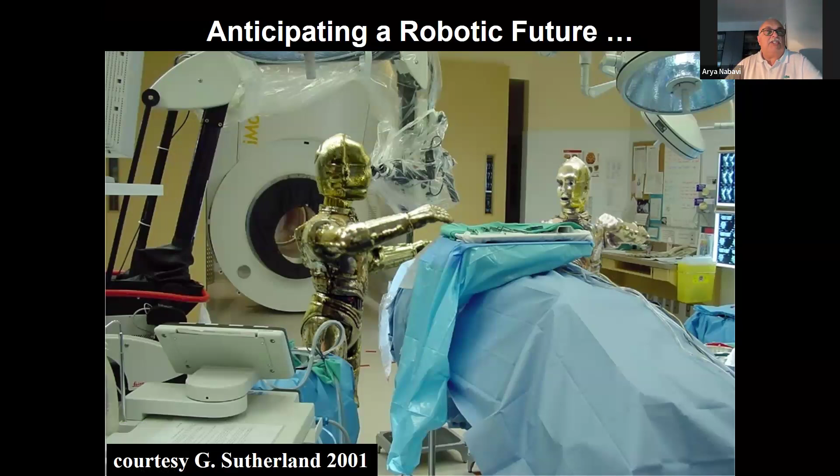I think all of us anticipate a robotic future. However, I think we have a pretty hazy idea of what it actually will look like. Now, this would be perfect for us to be on vacation and have these C3PO units work. However, I think none of us wants to be without work or without food.

So a lot of people look with apprehension on the future of robotics, and particularly surgeons have to look with some skepticism, because at the end of the day, it is us who really has to talk to the patient's relatives and make sure that the patient is well.

We need to form a solid basis for dialogue between engineers and roboticist developers. For this, we need to understand the subject and define our own demands based on firm knowledge of what we actually want to achieve and how we want to contribute to the medical field. That's very important—not just another checkbox on a webpage that says we do robotics as well. So we need to really concentrate on what we want to achieve.

A short overview of what this talk will cover: first, the question of what is a robot. Then I'd like to explore whether there is one robot, or multiple current systems, with common denominators and common differences, enlarging on classification in regards to man-machine interaction. I want to make sure we all have the basis for knowing how to advance and where to advance to. Then I'd like to go into a couple of the caveats that future development might hold for us.

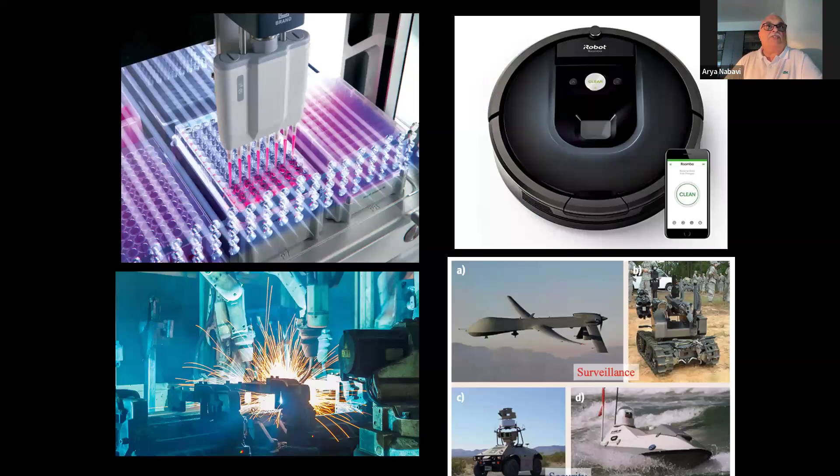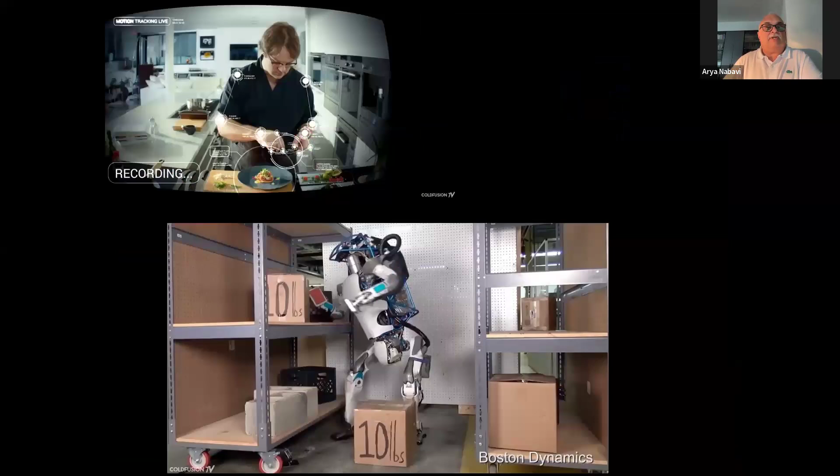We have household appliances like the vacuum cleaner. We have industrial robots. We even have military robots, which unfortunately have been quite notorious over the last couple of years.

But what most people likely think about when they hear robots are household appliances, which I find particularly appealing when you look at this cooking robot, which basically autonomously cooks according to a cookbook. You don't have to argue with anybody about whether the salt is too much, because the robot already provides that.

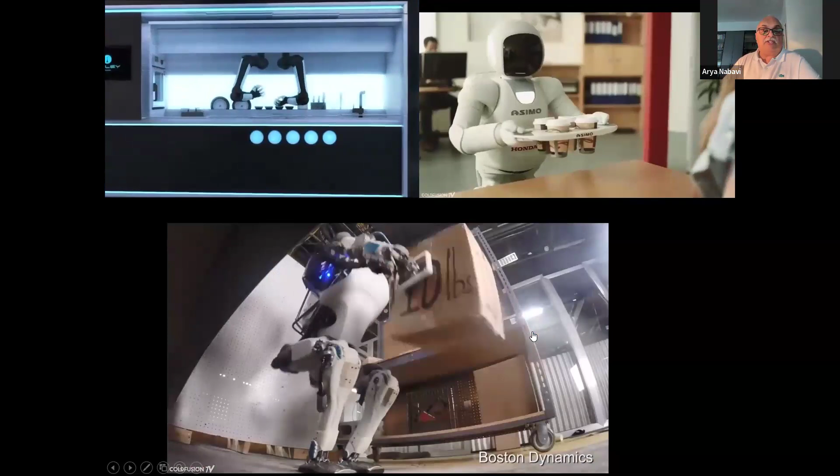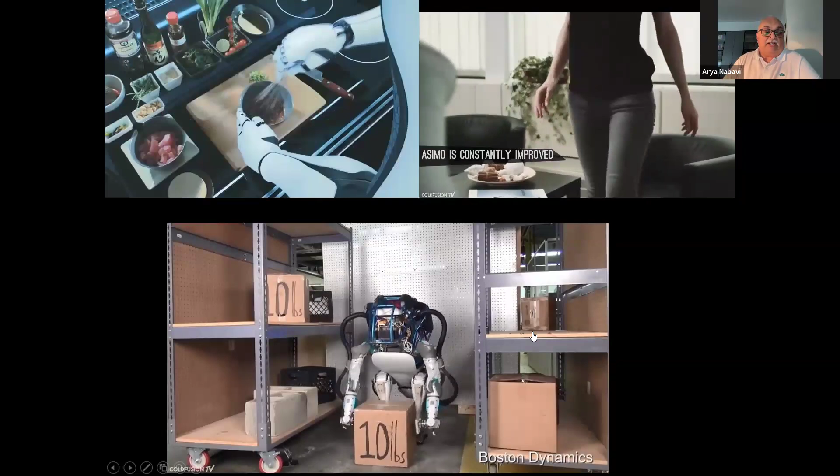However, what is imminent for industrial nations are these heavy-duty working robots with exoskeletons, and I'm sure a lot of you already think about military usages, which hopefully will never happen. However, everything that is thinkable is done by humans.

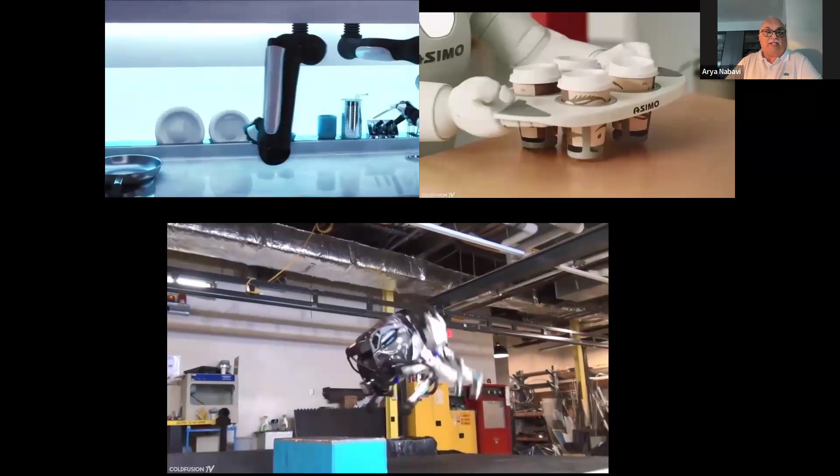You see that the gait and balance appear very good in this video, but according to the people who made it, when you ask them, this is one of more than 100 tries, and they stopped trying after this successful situation. So this is real, but it's not routine. We will still have to work on that.

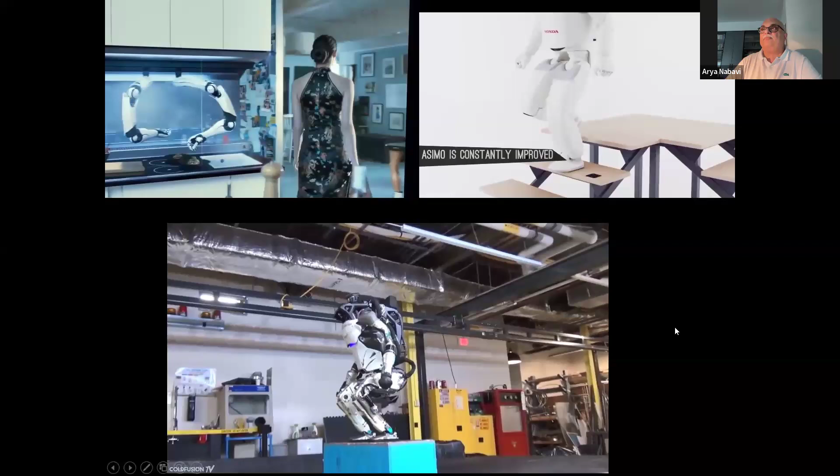Having all these forms of robots makes it very difficult to define what we are actually looking at when we're looking at clinical robotics, surgical robots, or medical appliances.

Robotics is nothing else than a multidisciplinary—by necessity, multidisciplinary—science, which involves all kinds of engineers, material scientists, and philosophy, which we will go into at the end. But mostly, from our perspective, it involves medical personnel and surgeons who have to define where the direction is going.

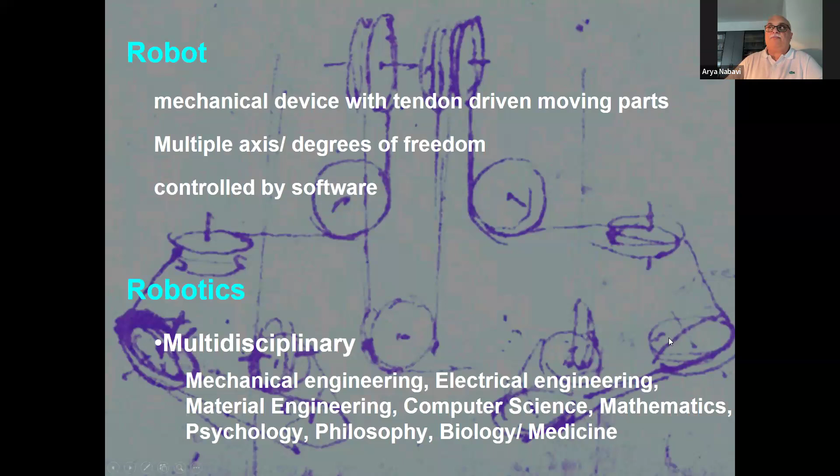Just to illustrate the confusion that we have in the literature, look at two prominent publications. One is in Surgical Neurology International, a review article about robotics in neurosurgery. I hope you would ask, what kind of robots? What are they used for? They don't allude to any of that. They talk about 100 educational programs in the United States and say that 30 of those offer robotics for cranial surgery, 40 offer robotics for spinal surgery. They do not specify whether they are the same services, what the robots actually do, what they're used for, and what kind of robots they are. So we already have a confusion in the labeling.

Another problem is the application bandwidth. As you've seen in the examples of robots I showed you, there are many applications, so robotics in neurosurgery is a tremendous field. However, of those neurosurgical-focused articles, 15 plus 3 editorials, so the topic is highly opinionated, 8 were spinal applications. I will not go into the one truly collaborative one; everything else was just entry-target positioning of screws. There was one Da Vinci review, and basically 6 stereotactic applications on the brain. So there is nothing where you'd say, okay, this is something where I actually need something computer-controlled. A lot of these things can be done by stereotactic devices or other holding devices.

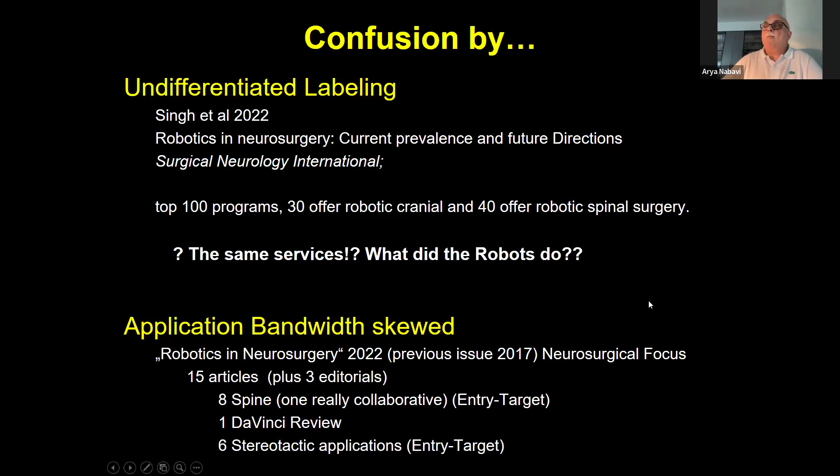The first examples of robots in neurosurgery were with the Puma 200 in 1985. I won't go year by year, but what you see here is a robot affixed to a table in the immediate vicinity of an imaging device, and remarkably this is still on the market. You have a robot that is a pointing device near a CT scanner, or within this burr-hole-mounted device. There were burr-hole-mounted devices way back in the 1940s, so we're going back with new innovations. That's also something that needs to be addressed by task forces.

However, this Monteris device allows you to work within an MRI, so within confined spaces. I'll allude to that later on. And then there's a multitude of systems that are used in spine surgery.

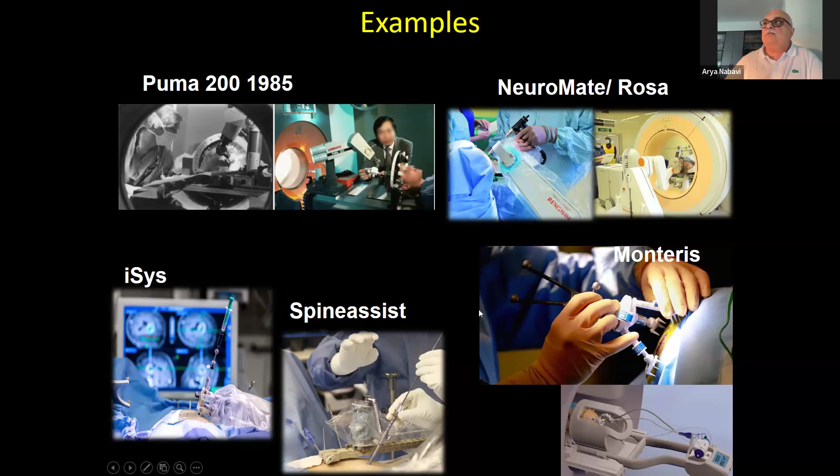Then what most people refer to as robotics is a telemanipulation device, the Da Vinci system. This is the most highly marketed system worldwide, and it definitely has advantages in urology, gynecology, and general surgery, since there's space enough for this device to be placed within and without the body. Now, everyone who does neurosurgery knows that space is the limiting aspect, so we will not have something like this on top of the head. The accessibility in neurosurgery is not really given with the Da Vinci system.

However, what needs to be borne in mind, and that's a good part about the system, is as a telemanipulator, this person is not running the computers—those people back here are running the computers. Now, this might not be very comfortable. However, a friend of mine in gynecology at the Brighams said, okay, while I could do 5 surgeries before we had the Da Vinci, now I can do 4, but my back is not hurting as much anymore because the ergonomics of sitting in the seat is much, much better. This can also be something where robots help us save the resource of the surgeon.

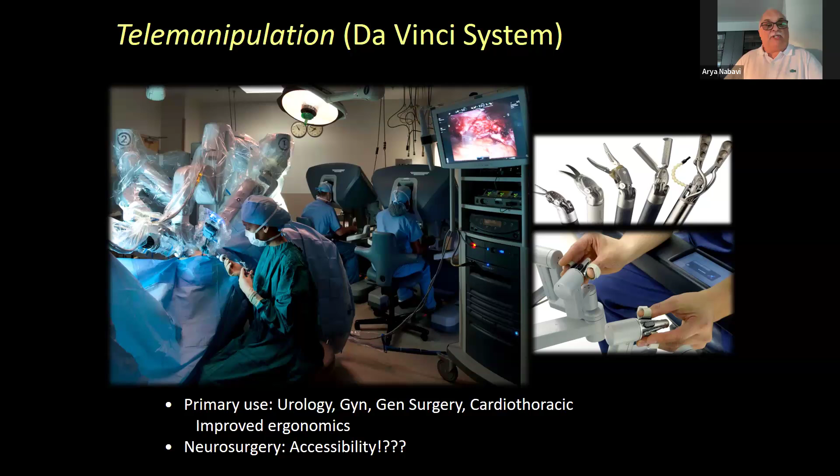Now, we neurosurgeons basically exploit ourselves to a much higher level than is good for our bodies. Maybe with computers and robots, we can have more ergonomics and do surgery for much, much longer than at present possible.

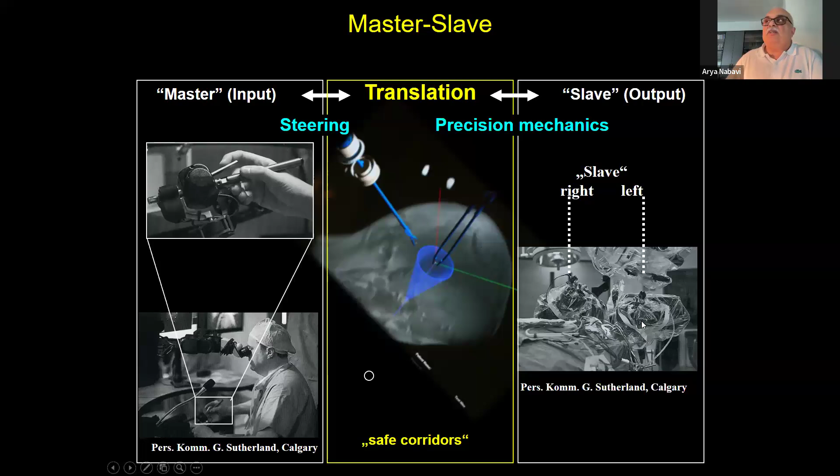However, what's really interesting is the miniaturization of robots and their application within a certain setting. These are all courtesy of Garnet Sutherland in Calgary. The interesting portion here is to describe a master-slave system. The master is basically us, and we use an input device that allows us to steer a robot in the immediate vicinity as a surgical robot. There are some constraints, such as corridors and neuronavigational aspects, as well as depiction of instruments in 3D, which allow us to run this robot on a monitor. Nevertheless, it is nothing else than the telemanipulation device of a Da Vinci, because it translates every motion that Garnet has—it's basically at present the only system I know of where every motion given as input through this device is immediately translated to one of those robotic devices in the operating room. We'll see a couple more images of that.

The basic idea, and you saw all those systems that are basically trajectory-based approaches to specific targets, cannot be defined by what they actually do.

Whether we would actually like to have autonomous robots that do everything by themselves, let's put that aside for discussion. I personally would not like to have that. However, I could imagine myself appreciating a robot that drills away the temporal bone for me, so I can do the interesting portions where I need my fine motor skills, after the heavy duty work is done.

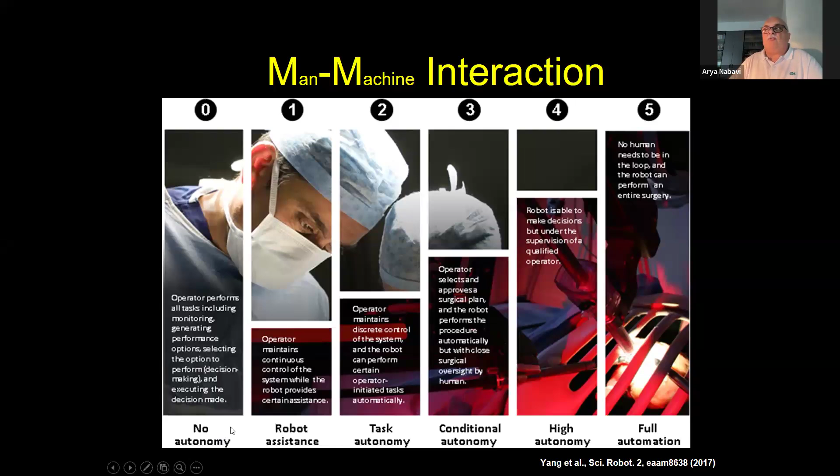Robots have another advantage. They do not need much space, and they can stay in an area for a prolonged period of time without their back hurting.

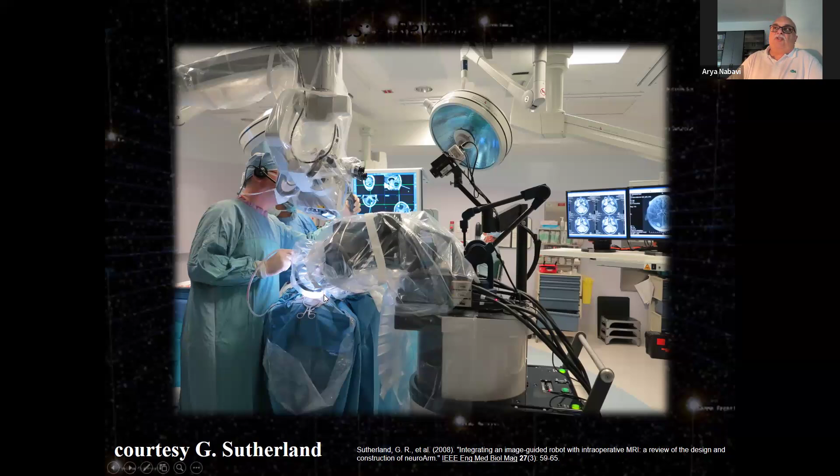This is again courtesy of Garnett, who is working on this, which is almost as close as it gets to collaborative or cooperative robotics, because he's working on a brain tumor, and this robotic device, which is basically a sidestep of the robo arm of the ISS, produced by Canadians, in Canada, in order to have four hands within his surgical area.

He definitely does surgery. He's not always sitting here in his chair, but this is another example of how using input devices in a remote position drives the robot, which is here within the operating room, assisted by a second surgeon who is actually working here. So we have four instruments working in a small confined space, and all of us know how difficult that would be if we had another human and not a robot working in that specific area.

Robotics - this is an interim summary here, not the final one. There's going to be a couple more slides. What I wanted to show you so far is that we have a large and inhomogeneous field.

For clarity in regards to the definition of surgical robots, we should define them as proposed by Yang, by the man-machine interaction. The current systems are either trajectory-based systems or master-slave systems where the robot or mechatronic device fulfills your orders. The transfer of results from other surgical specialties needs to be done with a large grain of salt, because we have other tissue characteristics, the feedback we have is different, and of course the major issue is accessibility.

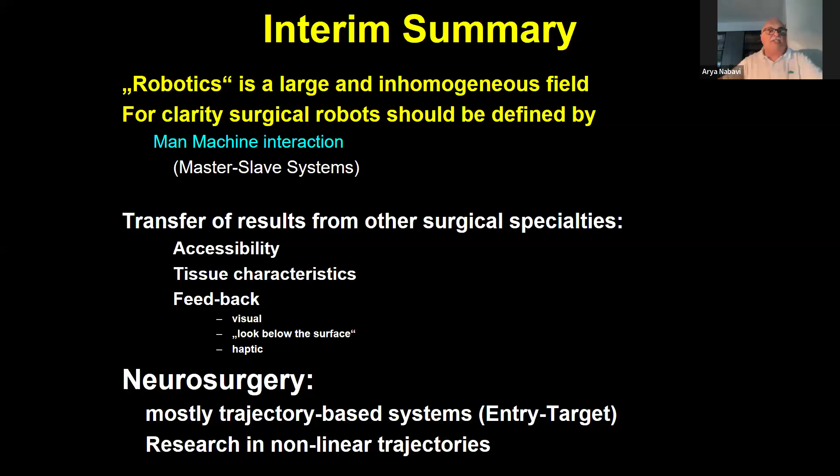There is current research in nonlinear trajectories, basically a needle that goes around the bend. I'm skeptical whether that will actually reach prime time. However, it gives us interesting input about material properties.

So how do we get on from here? As I said, these are the ones that are already being done, and these are the ones we should work on. I'm pretty sure I don't want an autonomous robot - I wouldn't want an autonomous robot working on my brain. However, I think conditional autonomy, where a specific task can be ascribed to a robot, should be something available. I'm thinking that it is within grasp - not within the near future, but at least within grasp.

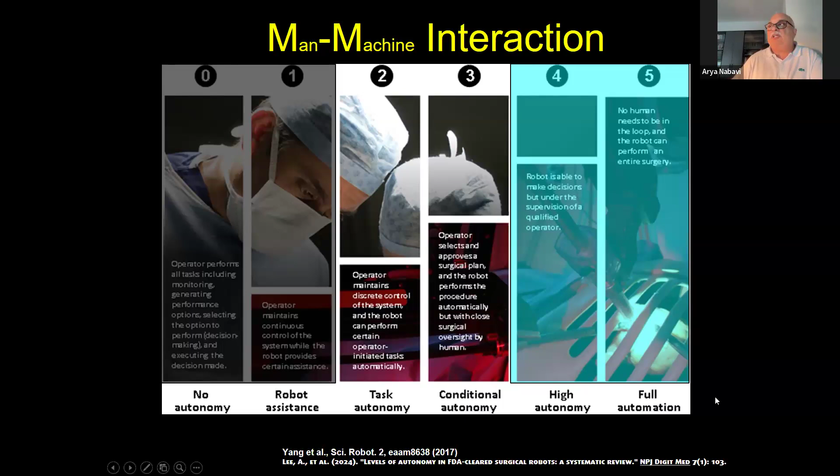Which necessitates some kind of robot autonomy, called embedded neuromorphic intelligence. I find that very scary because it basically refers to having a robot that does the same thing as a human being, with feelings, emotions and everything, which would be good. However, we know that not every human being is good, and we do not know if every robot would be good. What I call adaptive creativity basically refers to situational awareness to decide in novel and dynamic situations, which is basically what we do during surgery.

Not every surgery is the same, which means that we need to comprehend situations and an environment. A robot, in order to obtain autonomy, would have to have the same intraoperative control, be it by navigation, electrophysiology, intraoperative imaging, and of course experience.

So the robot needs to remember what has been done before, which is what we do during surgery. Also, what I refer to as anticipating iterative outcomes means: what if I do this, what will happen next? So generalizations and predictions need to be included into the autonomy as well, and obviously the results need to be maximized.

However, we need to define with the robot, and this goes into the consequences and the ethical framework, how we actually define results in a way that a robot can perform them.

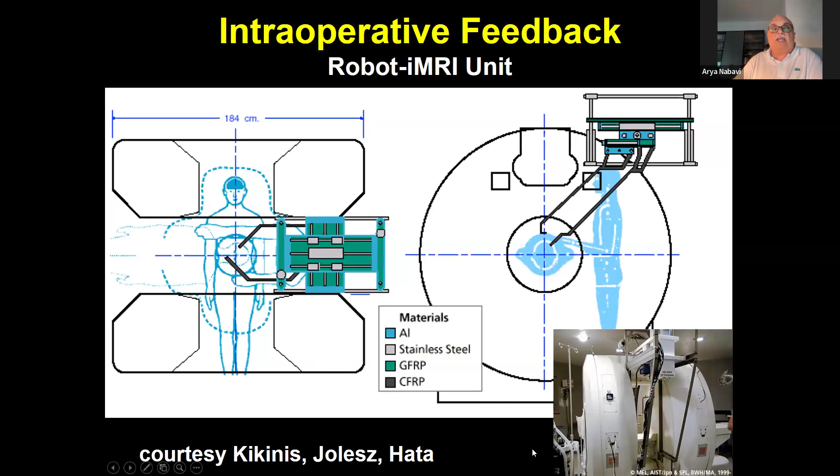With further miniaturization, it will be possible to have robots that actually work within an intraoperative imaging device. Is that necessary?

So we need some update to control that and to stop the robot from doing that. We did simulations in the old days, and even nowadays, the simulations that use finite element modeling do not predict brain shift in a way that actually can be used within robotic devices.

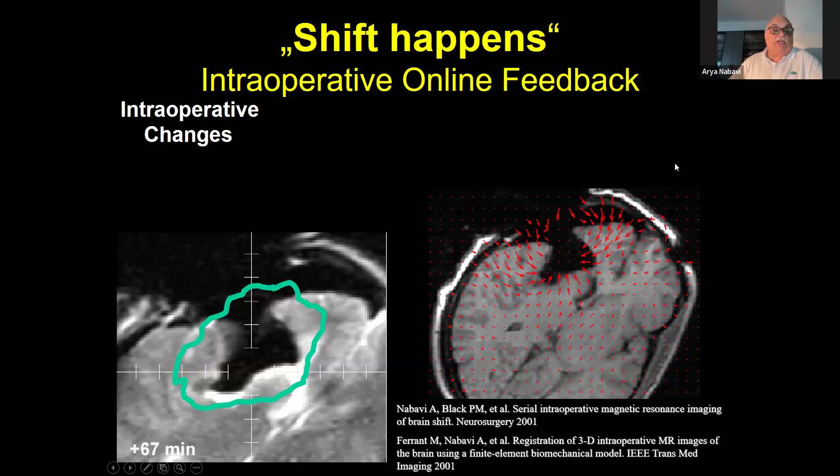What may help us, though, is further research into haptic devices, as here also displayed by the group from Garnet Sutherland, where we do not only move the instruments by telemanipulation, but we can also capture the forces that are exhibited on these instruments, which will help us make sure that these instruments can be used with normal haptic feedback.

So cooperative surgical robotics need to integrate the information as we do in our situational awareness, and need to include what we have as manipulation skills, creativity, and hunch or intuition.

The robotic skills obviously are menial mechanical tasks. They do not tire. They can reproduce with precision forever what they're doing, and they have multiple degrees of freedom, which allows them to work in confined spaces or hostile spaces, be it for rescue situations.

How do we go on from there, and how do we empower the robots to actually have autonomy, as we refer to? Now, obviously, if the robot always needs to go back to the central processing unit that tells them, in coordination with all the information gathered during surgery, how to react...

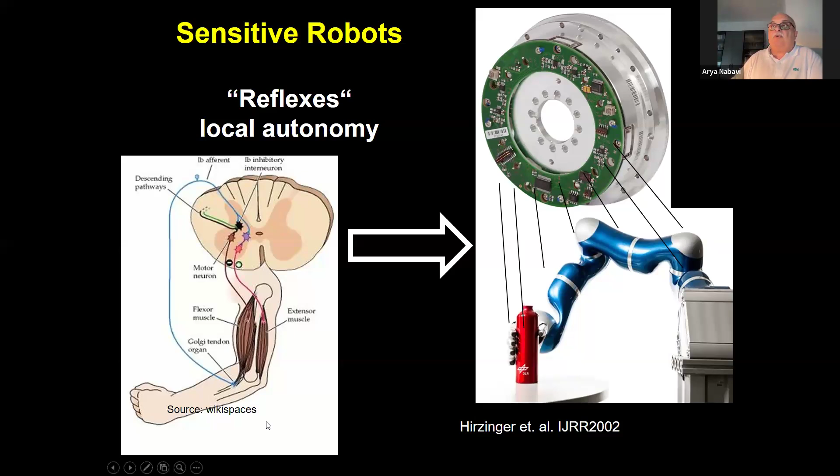And as they have the joints, and we have electronics to actually feel where the joints are, we can simulate those kinds of reflexes, and we can take this information from the research for prosthetics and sensitive robots. So we're leaving the area of surgical robots and picking cues from the area of prosthetics and research into how human locomotion works and how we can translate it to a robot.

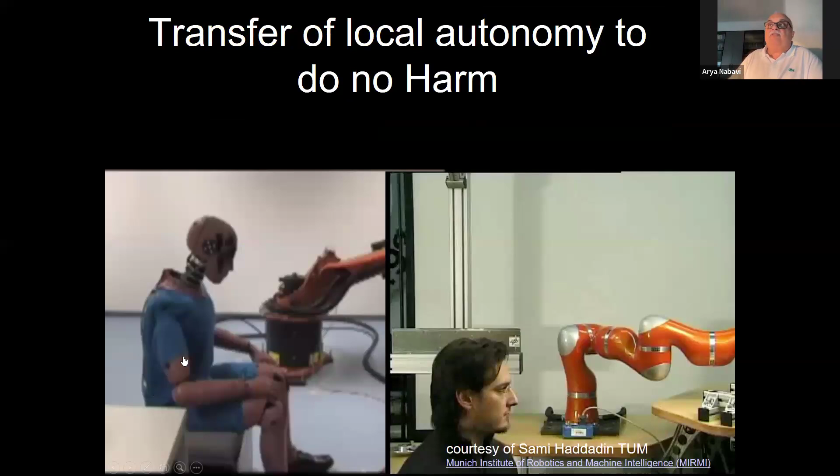Now, obviously, most of us think of a robot, and this is the first issue that needs to be covered: the robot receives a task and fulfills it without mercy. Now, obviously, that is nothing that we can use in surgery.

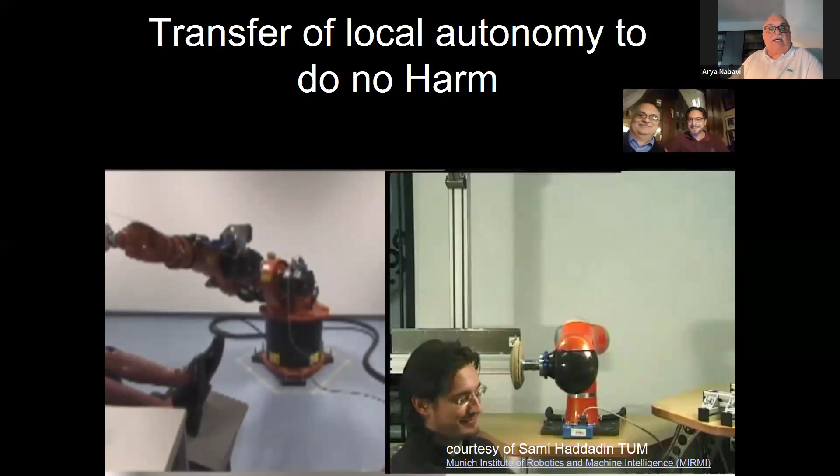So Professor Sami Haddadin, who's a good friend of mine, was basically working on how to have the robots receive some sensitivity and react to their surroundings. So the first issue is to do no harm. And he is smiling, and since this is a couple of years later, he didn't get too much harm by this very placative demonstration of robots that can stop in time.

Also, they need to be able to react to certain stimuli without totally losing control. This is simulating light pain by having a receptor here, which can also be a thermal detector that reacts to heat. You see it shrinks away in regards to touch but still keeps the position. Also, the same as with our joints, we need to know where we are and how to reposition ourselves, so proprioception can also be simulated.

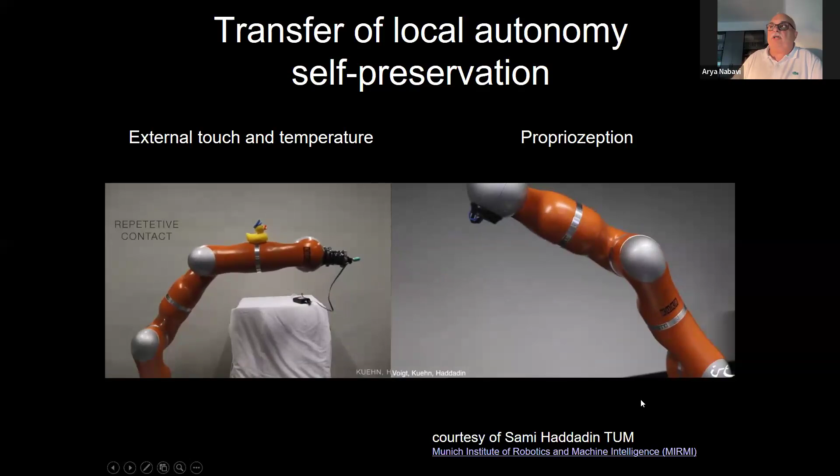By the joints and by a quote unquote sensitive robot. And the result is, as you see in this, a non-invasive EMG controlled robotic arm. I'd like you to notice how the fingers actually move.

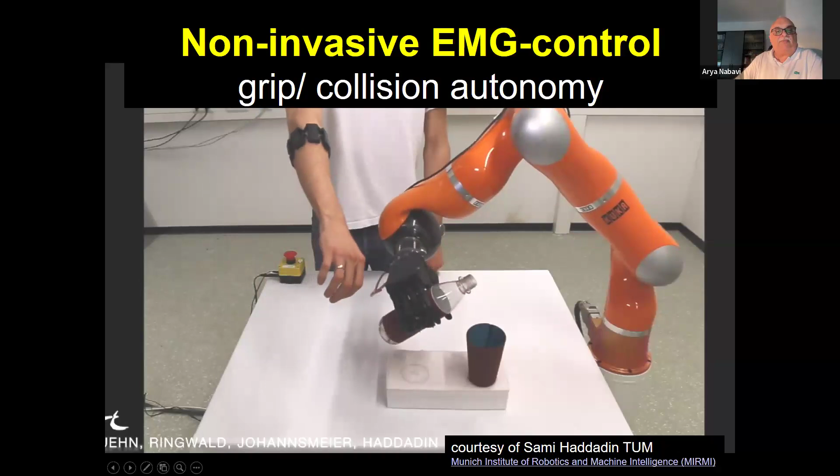In addition, it's when they grab the bottle, so this initiates the robot. Bottle is being grabbed, soon hopefully, and now watch for the fingertips. See how they readjust at the end. So this is something that is local autonomy in order to grab the bottle. Now, what also will happen is after the robotic arm grabs the cup, which also, please note the fingertips, is going to be a collision detection.

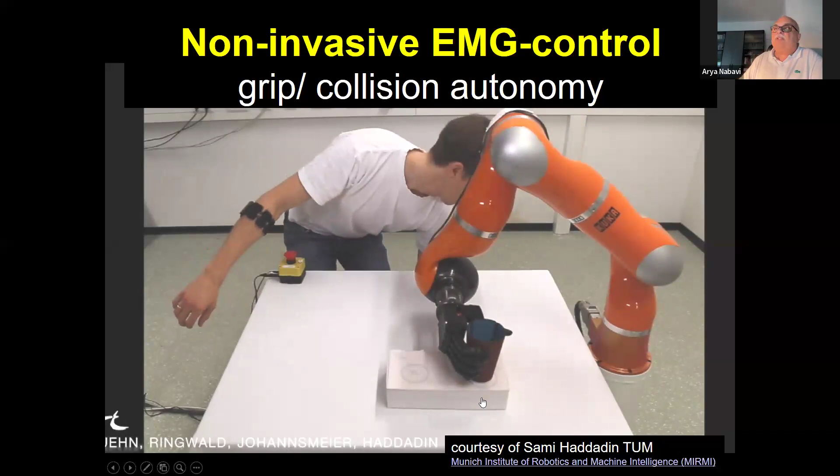It's a bit lengthy. I thought about speeding it up, but then it looks very fake if you speed this up too much. This is the normal speed, and again, watch how the fingers tighten the grip in addition without another signal. And now an obstacle is placed in the way.

Which could be another surgeon at that position if you have a surgical robot. And it will stop and shrink away very, very strongly. Now, this is something that you can obviously do with computer programs to make it not shrink away that fast. But the basic idea was for you to see how this arm can be moved by this researcher, as well as how you have some local autonomy in regards to gripping.

The cup. So again, another intermediate summary. What we can do already is acquire intraoperative information. However, what we need to do more perfectly is to transfer local control more into the robot and away from central processing units. We, as surgeons, need to define what we want. And as I already alluded to, full autonomy is something that at present still scares me.

All of you, and a lot of the people listening to us, are residents, but all of you train residents, and we usually train them step by step, and we don't give them full autonomy in the immediate setting. And those are human beings that are being trained much easier than robots. So I'm very quizzical about full autonomy.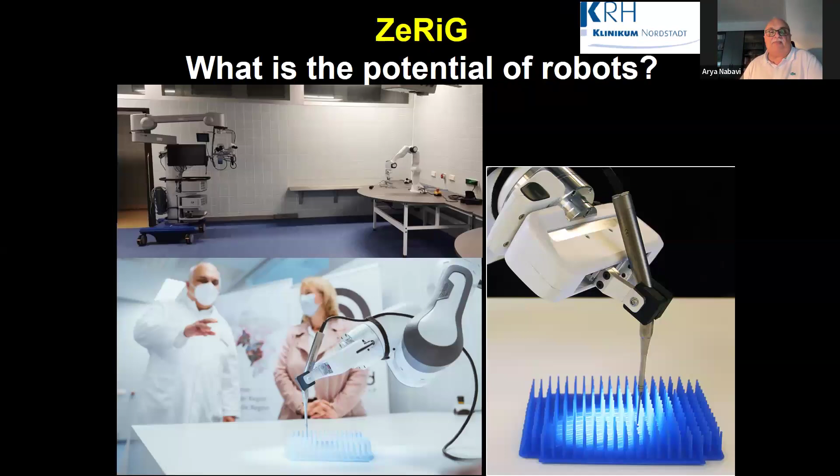To talk about issues and to try and solve not just problems, but to address problems and to find a common language. And one of the issues that I experienced is that me, as an old surgeon, I think about ways of how a robot can do something that I am doing. That might just not be the right way of approach.

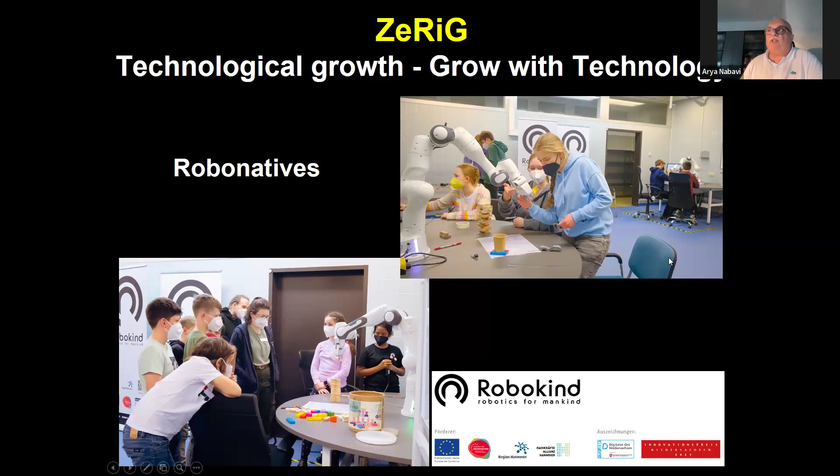Because, as I realized when we had these children in our laboratory, these children are actually growing up with smartwatches. I still don't have a smartwatch. With smartwatches, with the knowledge about robots and how to use robots and how to integrate robots into their normal everyday life experience. And the program is basically called Robonatives. And what I think will lead robotics forward is not just the technological growth, but rather the grow with technology. So it's not that we define what the next generation of robots will be, but these young people will define how they can use robots for specific tasks very naturally, very much the same way as we currently use cell phones.

One very important aspect still needs to be mentioned—it's always at the end that's the problem, but it is central to everything, and I think I alluded to it quite extensively already—is we need to bear in mind what the ethical principles are under which we work. And obviously the first two are already proposed with Hippocrates, which is do good and try not to harm.

That needs to be transferred into robotics also. However, quality of life needs to be defined. How should a robot know what quality of life is?

We also have different conceptions of quality of life, and that refers to ethical relativism. In Europe, all of us, including most people in the European Association of Neurosurgical Societies, have a certain concept about ethics, be it moral philosophy as with Kant, or utilitarianism as with Mill. However, ethics is not ethics all over the world.

We need to make sure that those people who actually program those robots are given the opportunity to find out in which direction they should work. And justice, of course, equal opportunity, truthfulness, and honesty.